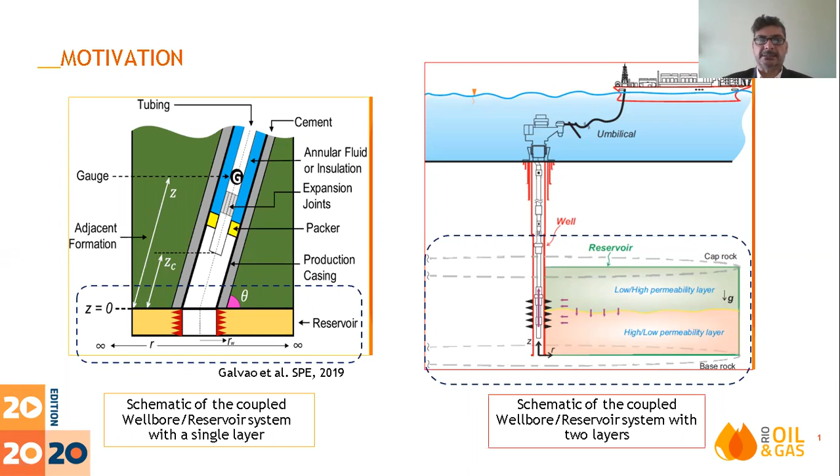Conventional well tests assume isothermal behavior of the flow in the reservoir. However, recent studies show that considering only pressure data can lead to misinterpretation due to neglected thermal effects, specifically in high transmissibility reservoirs, such as in Brazilian pre-salt reservoirs.

During field tests, the evaluation of a reservoir with several layers is done through a well test called a multi-layer test. However, this test is complex, time-consuming, requires prior knowledge of the profile, in addition to the need for flow and pressure measurements of individual layers. There is a challenge to propose a protocol to obtain the characteristics of the multi-layer reservoir from pressure and temperature data obtained at a single point above the reservoir.

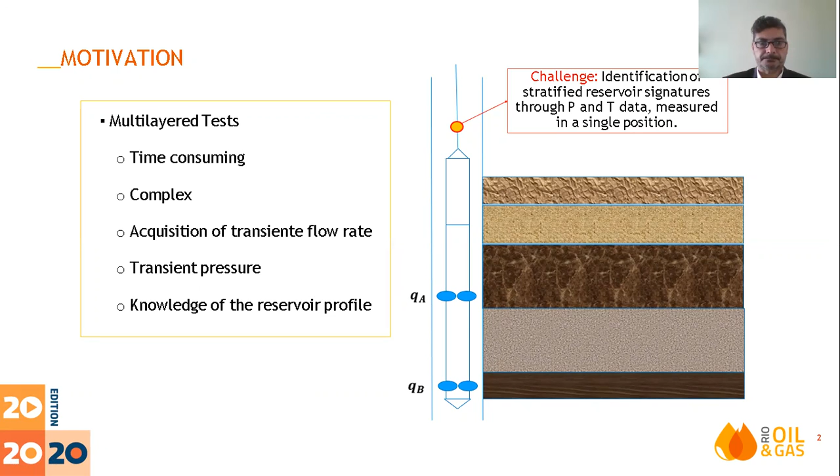Based on these motivations, the objective of this work is to develop a numerical, transient thermal model that allows the stratified reservoir analysis, identify and understand the phenomena that occur between the stratified reservoir and the production well, and to find a protocol that identifies the stratified reservoir characteristics through pressure and temperature data measured in a single position along the production well.

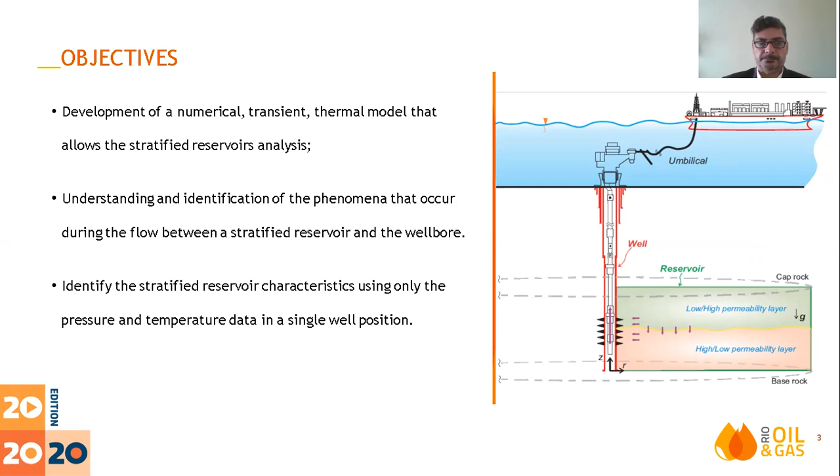The mathematical model that describes the transient flow and heat transfer that occur along the well consists of conservation equations such as mass, momentum, and energy balance for a slightly compressible fluid, considering the source terms for the mass and energy equations that come from the stratified reservoir.

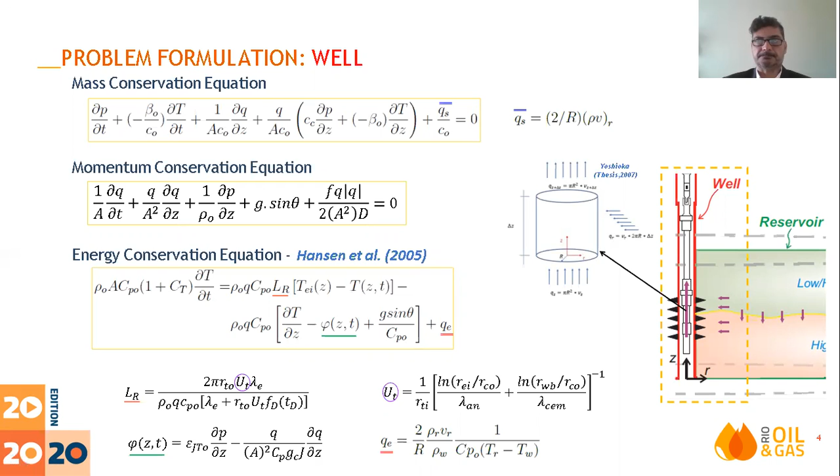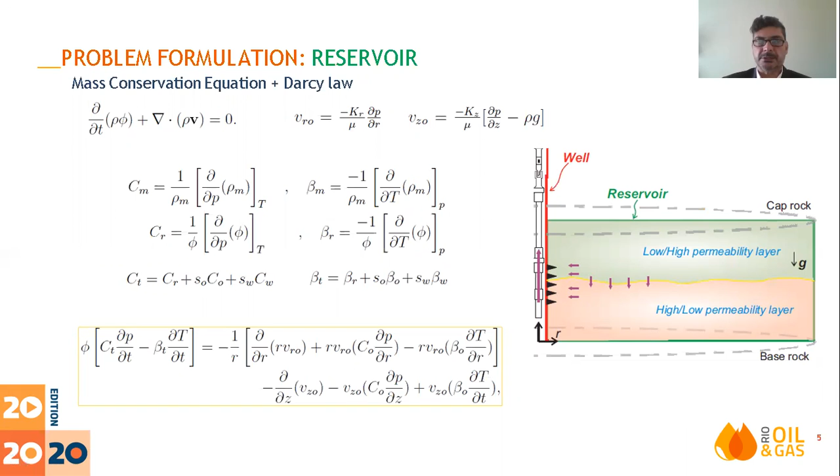The final form of the mass conservation equation for the reservoir is obtained using the concepts of compressibility at constant temperature and the expansion coefficient at constant pressure, and the momentum conservation equation in the form of Darcy's law for flow in porous media.

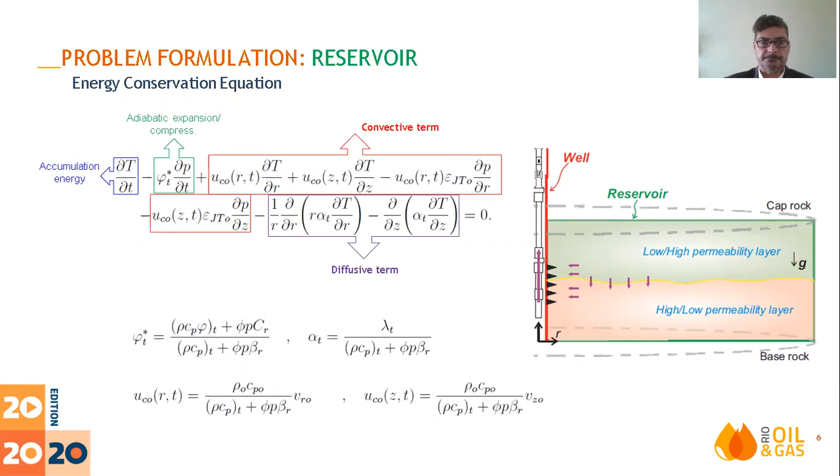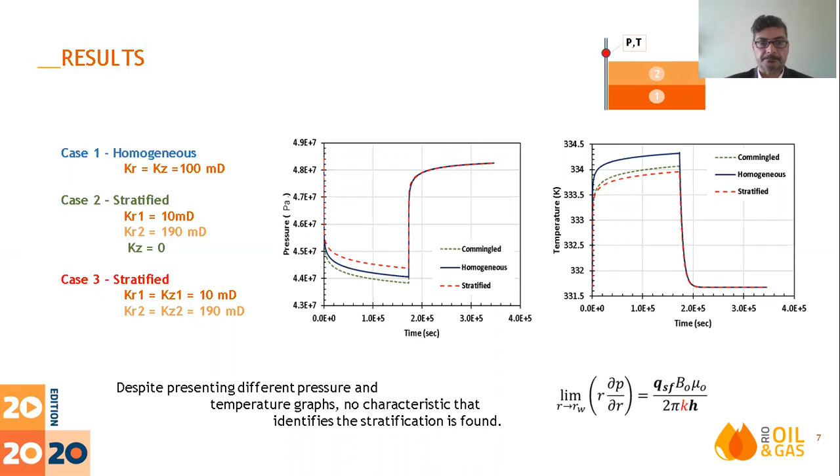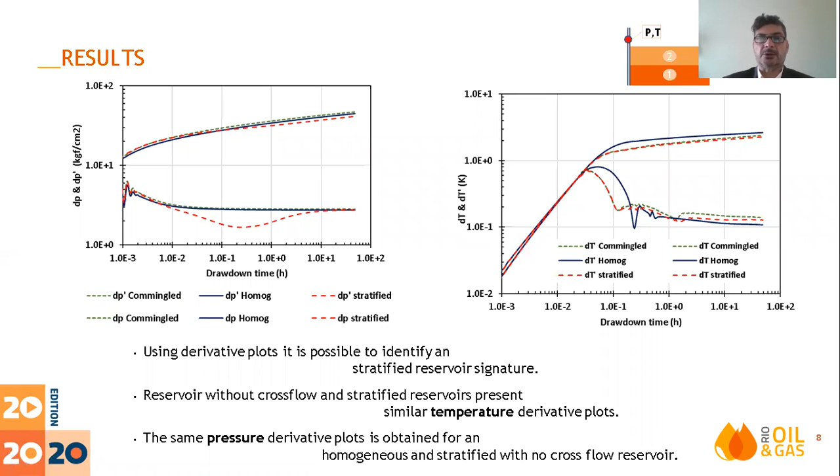The use of the Bourdet derivative for temperature reveals the different behavior for homogeneous and stratified reservoirs, both in the case of commingled and cross-flow reservoirs. And the use of the pressure and temperature behaviors together allows the identification of the reservoir.

Here we present a pressure profile inside the stratified reservoir. Here we can see the radial direction, the vertical direction, and the two layers, the lower and the upper.

In the beginning of the test, early times, the stratified reservoir behaved as if there was no flow between layers. As time goes up, due to difference in radial velocity between the layers, there is appearance of a pressure differential greater than the hydrostatic gradient. And this gives rise to a vertical flow between the layers. Advancing a little more in time, the hydrostatic gradient, which dominates the well's behavior, is also extended to the reservoir, ceasing the vertical flow. At this point, the reservoir starts to behave as if it were homogeneous.

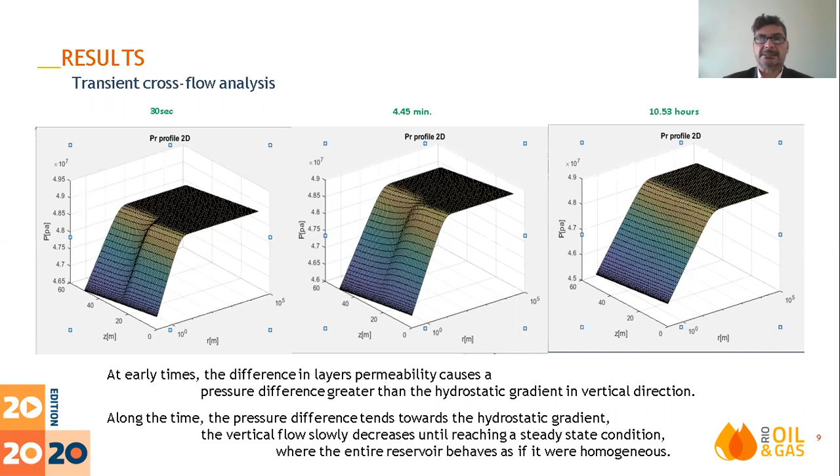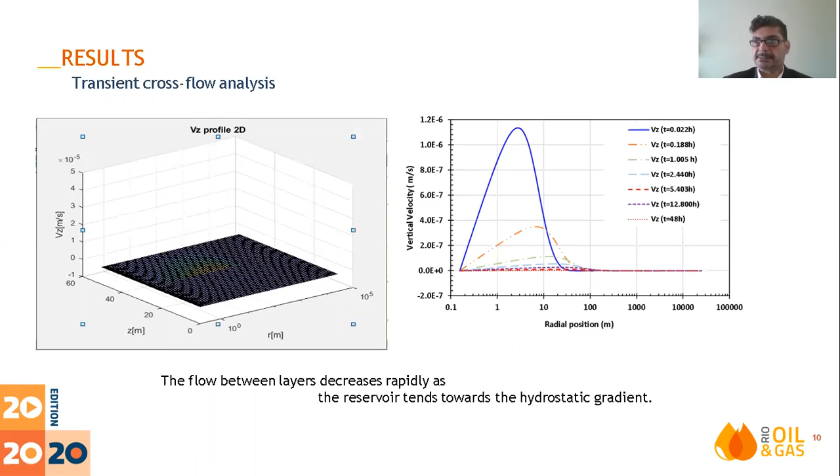We repeat the test for three similar stratified reservoirs, only with different vertical permeabilities. The pressure differential between two layers of each stratified reservoir was monitored during a drawdown test inside the reservoir, at a position of 1.5 meters from the wellbore. In the beginning of the test, the stratified reservoir behaves as if there was no flow between layers. As time goes up, due to difference in radial velocity between the layers, there is appearance of a pressure differential greater than the hydrostatic, and this gradient gives rise to a vertical flow between the layers.

Advancing a little more in time, the hydrostatic gradient, which dominates the well's behavior, is also extended to the reservoir, ceasing vertical flow. At this point, the reservoir starts to behave as if it were homogeneous. The higher the vertical permeability, the faster the reservoir approaches the hydrostatic gradient. Inversely, the lower the vertical permeability, the more time the reservoir needs to equilibrate the pressure.

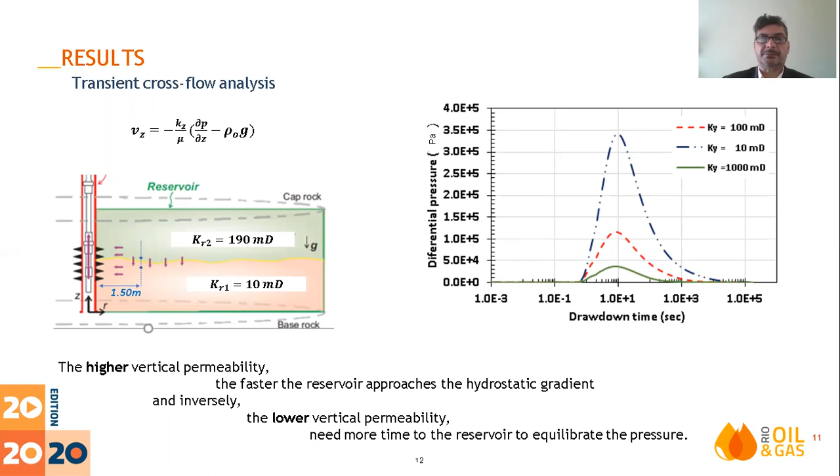Pressure transient analysis is used to characterize the reservoirs. However, only pressure data is not enough. There are different reservoir configurations that lead to a similar pressure signal. As an example, three different reservoir configurations are tested: a homogeneous, case 1, stratified, case 2, and another vertically homogeneous reservoir with an internal region of high permeability in the radial direction, case 3. Pressure transient behavior of cases 2 and 3 are similar and can lead to a misinterpretation, as shown in the pressure derivative graph.

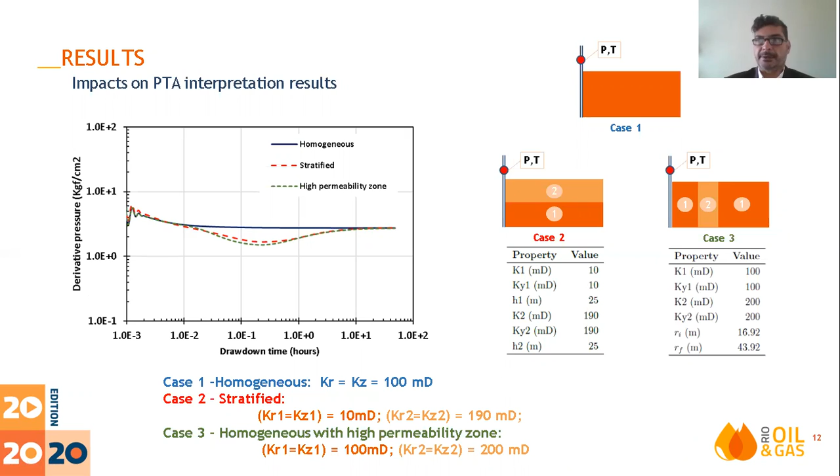This misinterpretation can be avoided by evaluating the temperature derivative data, as shown in the temperature derivative graph. Cases 2 and 3 have different behavior, and the combined use of pressure and temperature can be explored to estimate the correct configuration of the reservoir. The heterogeneity along the radial direction with high permeability region does not change the temperature behavior plot, which makes the differentiation with respect to the stratified case easy to observe. Temperature transient analysis, TTA, in a two-dimensional reservoir coupled with a wellbore can be used to distinguish different reservoir configurations in addition to pressure transient analysis, PTA.

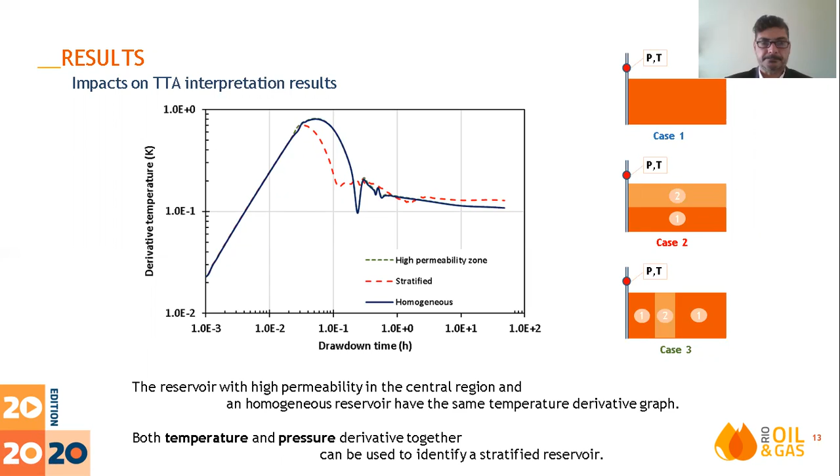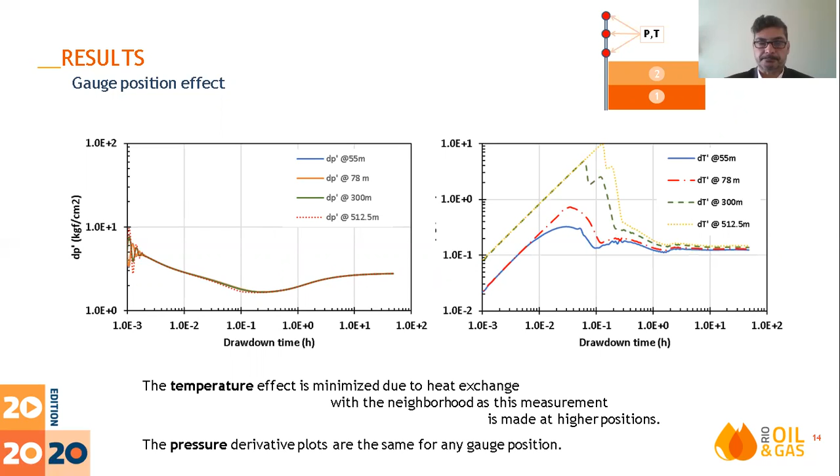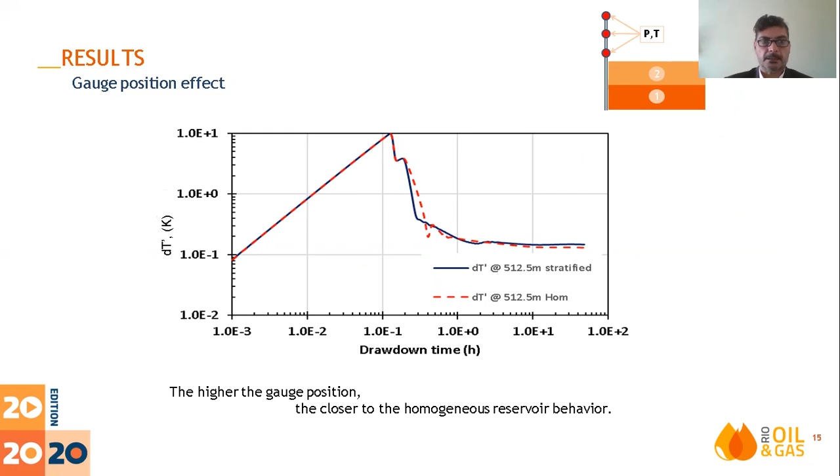Well, this work provides a tool for the two-dimensional and non-isothermal analysis of the radial reservoir. Density and porosity are considered as functions of pressure and temperature. And the combination of the interpretation of the results of pressure and temperature derivatives allows the identification of a stratified reservoir through data from a single position in the well just above the reservoir region.